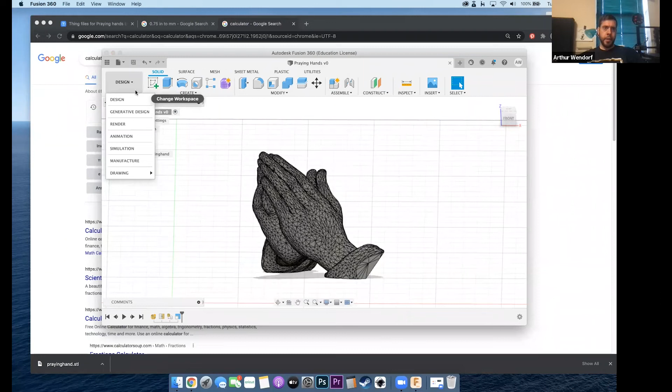So we're going to go to manufacture now. So we were in the design tab, now we're in the manufacture tab.

So now we're going to right click on setup, new setup. What we want to do is create the block of wood that we're going to be carving from. We're going to leave machine alone.

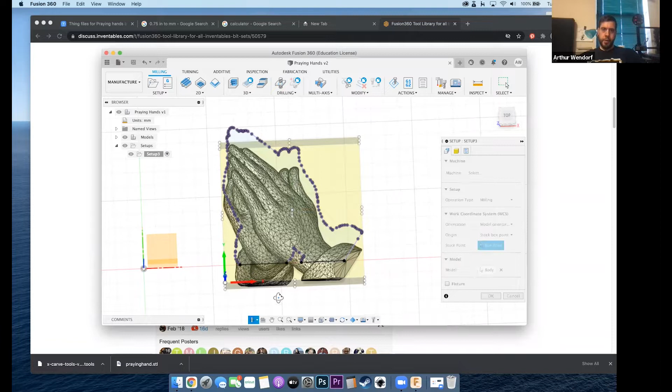We want to pick what point we want the machine to start at. We want it to start at the bottom left-hand corner here, but there are 3 dots there, one in the middle, one on the top, one on the bottom. We want it to be the top one of those. So if you look at it from this angle, it should be Z going up, Y going up that way, X going up that way.

All right, so we got the orientation. Now we're going to do the size of the box. We're going to do a fixed box size. We want the width, let's just click on top here so it makes it look right. So the width looks good.

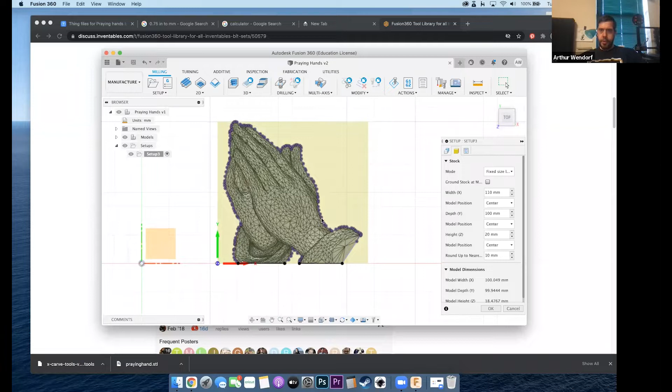We don't need to worry about that one too much. And just so it's not in my way, I'm going to click on the eyeball next to my sketch, so that's out of the way.

Now the depth, that's a little off, we're going to increase that. We'll make that 110, yeah that looks good. And those are centered, that's what we want.

The Z height, that's for the thickness of the wood. Remember, we said that 0.75 inches is about 19.05, and we're going to make it just a little bit more than that. So actually, what we'll do is we'll do 19.75. It's just one that I usually use.

Now these, the Y axis and the X axis are centered, that's fine. But for the Z one, we don't want it centered, we want it offset from the top, and we're going to offset it from the top by about 0.2 millimeters.

And then we're going to name this praying hands, that'll just be the name of the G code that it outputs. We'll say OK, now we have our box.

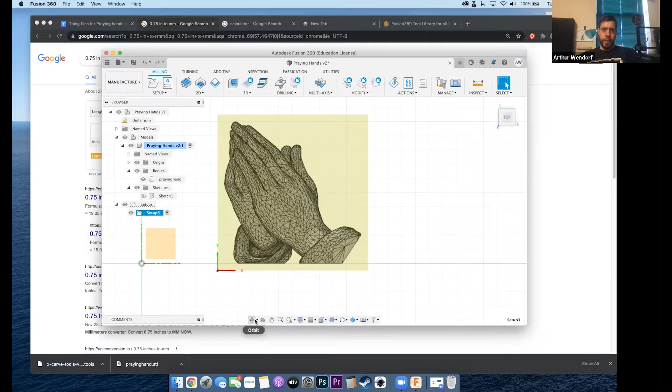Our box contains our model. Our model is a little offset from the top, and it has some room around the edges, so it looks pretty nice. Okay, so we're going to go ahead and save that again.

All right, so the next thing we're going to do is hog it out. We want to get rid of the bulk of the material that's in there. So we're going to do 3D adaptive clearing.

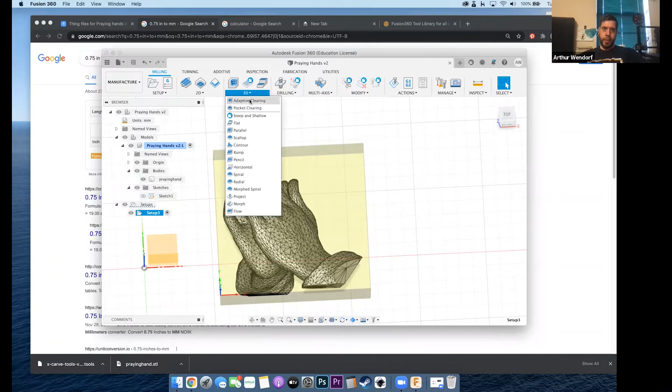So on this first one, we're going to select our tool. We're going to go to our X-Carve tools, and I usually use the straight end. It's also the black one, just so you know. So we'll select that, we're not going to worry about any of the settings on there.

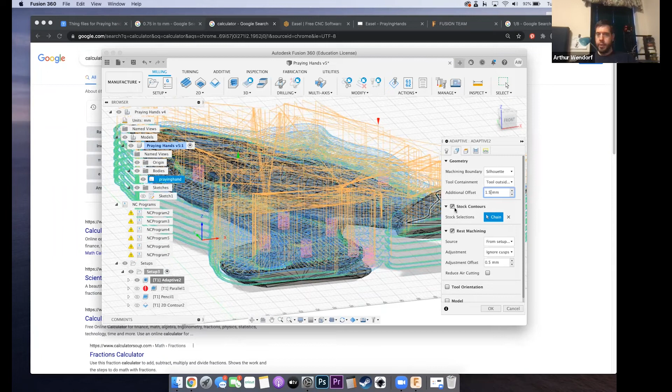On the geometry, for the machining boundary, we're going to use silhouette. We're going to have our tool outside of it. So because it has an offset here, we also want to have an offset up here. We're going to do 1.5, that'll give it enough room to go down all the way along the side, and that way the ball nose won't have to do that.

For our stock contour, we're going to turn back on our sketch here so we can see that. So we're going to select that. We want to make sure that when we have it, it is the nice blue line all the way around. Okay, so it's selected the boundary here.

We're going to leave from setup for the source, tool orientation, we're going to leave all that the same. For this, we don't want it to go all the way to the bottom, because what it would do is it would just break it loose. At this point, it doesn't have anything holding it there. So we're gonna leave it, we're gonna say about 3 millimeters on the bottom.

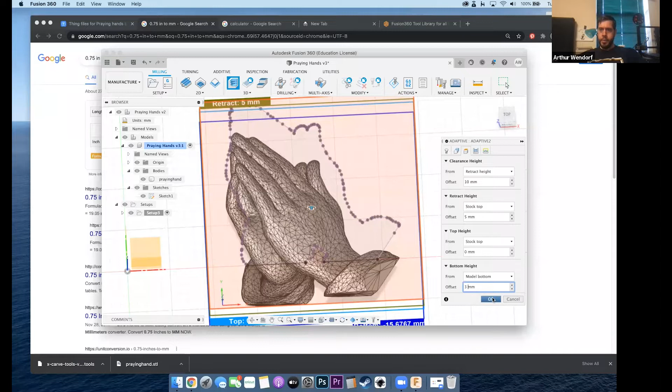On our passes, what we want to do here is we want to have our maximum roughing stepdown. We don't want it to go all the way down in one go, we only want it to do about 2 millimeters at a time. It'll automatically change the fine stepdown to 0.2, which is good.

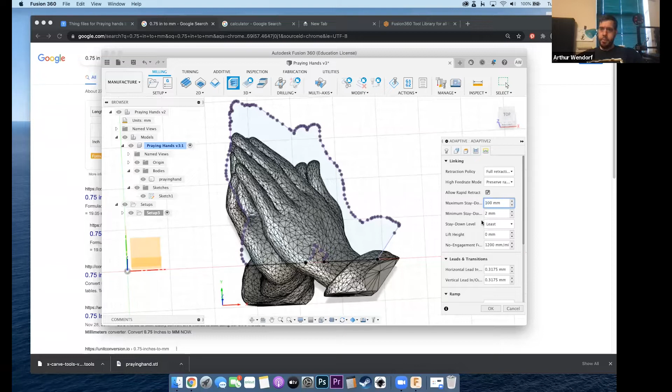That should be fine. The next thing we want to do is increase the maximum stay down distance so it doesn't keep popping up all the time. We're just going to make it 100 millimeters here, and then we'll say OK.

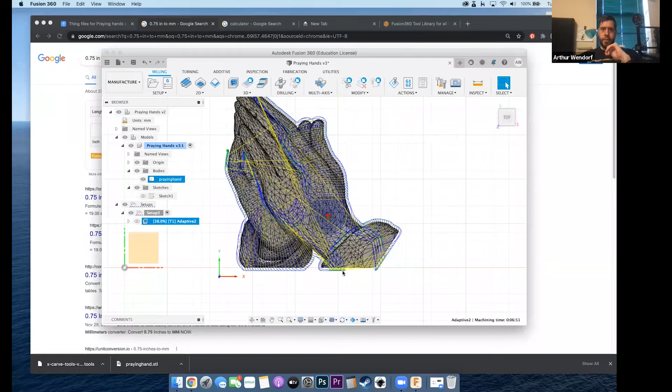Now it's generating the tool path, deciding where the bit is going to go. I'll turn off the sketch again. You can see it's going around the outside of the model like we told it to. The yellow lines show where it's going to pull up and travel without carving, and the blue lines are where it's actually carving.

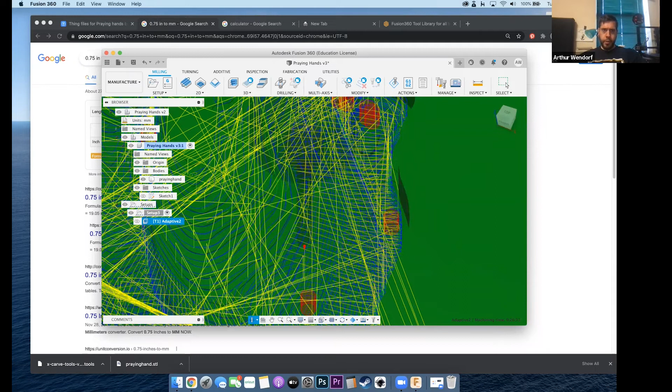So here we have the completed tool path for hogging out. If you rotate it and zoom in, you can see where it's been hogged out. This is just rough - it's not doing the fine detail yet.

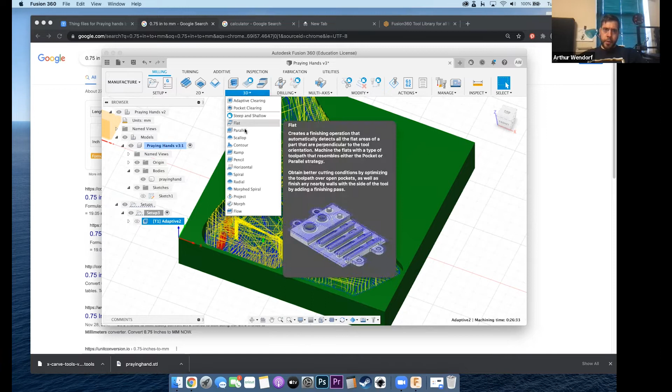So that's good, we got that 3D one done. Next we're going to do the more fine detail. We're going to go back to 3D and do parallel. Click on parallel. For the tool this time, we're going back to our X-Carve library, and we want to use the ball end - click on the ball end, it's the red one, that's what we want.

Leave all those settings. Again, we're going to leave it on silhouette, and do tool outside boundary. We are going to change something here - we're going to say rest machining, from previous, and ignore cusps, and change the adjustment offset to 0.

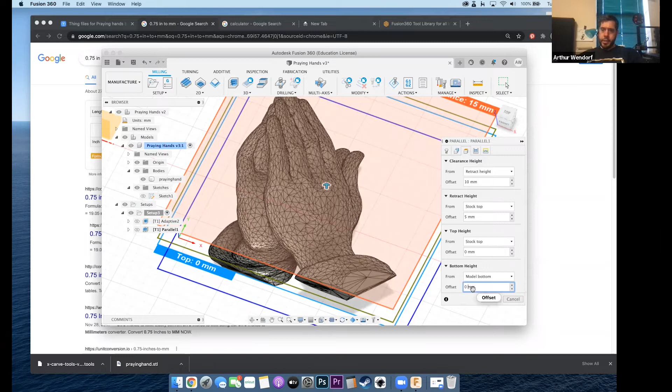That just gets rid of the extra layer since we're down to the details now. On this one, again we want to make sure we set this as 3 millimeters - we don't want it to go all the way to the bottom. For the step over on the passes, usually I do about 0.5 millimeter, and on the last one we'll leave that as 100 again. Then we'll say OK.

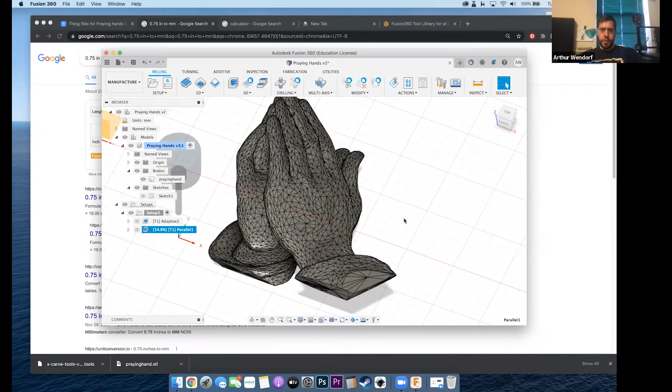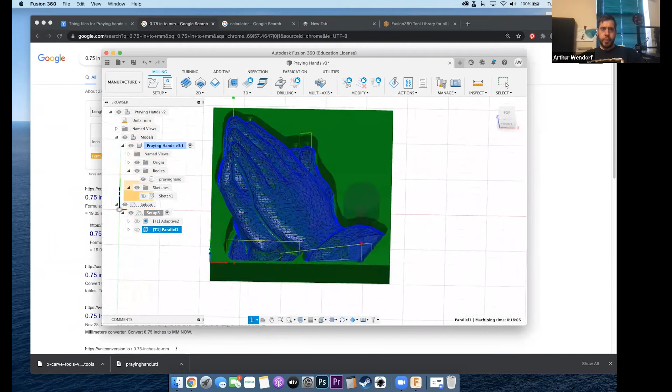So now it's going to compute this one - much quicker. You'll see it's going back and forth instead of just going in circles and drilling it all out. A couple things you want to look for here: make sure it hasn't tried to move through some stock left over. Sometimes it'll just go right through a big piece of stock we hadn't hogged out, though it doesn't look like it did here.

Okay, so you can see that's looking pretty nice right there. It's already got a lot of good detail and it's looking a lot smoother.

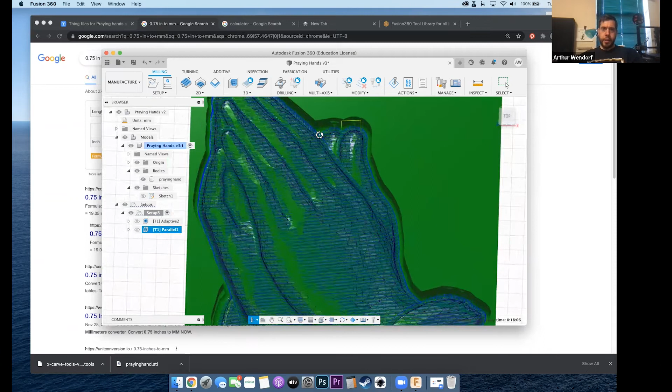We are going to do one more 3D here - we're going to do a pencil pass. We're going to select a tool, using the same tool, the ball we did before, the red one. So select.

Here again, silhouette, we're going to do tool - this time we're going to leave it on center on boundary. Again, we don't want it to go all the way down, just leave it off by 3 millimeters. All this should be fine, we're just going to say OK.

So the pencil pass adds in the fine details - see, it's doing the sharp edges and stuff, like the creases between the fingers and around the sleeve.

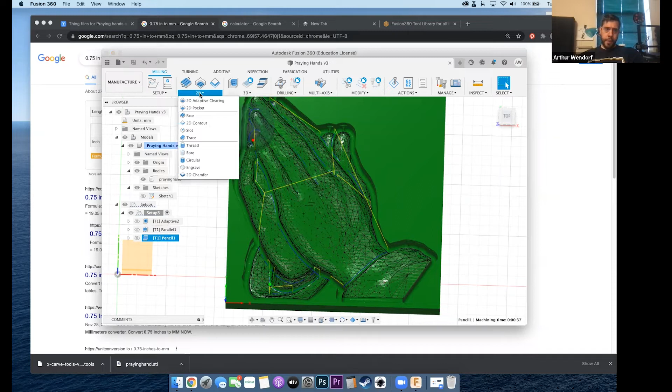And then the last one we're going to do is a 2D, and we're going to do a 2D contour. For our tool, we're going to go back to the good old black one, right?

The flat end mill, select that. And we're going to say okay. I'm going to select my contour selection.

So we need to see our sketch again, so we're going to select that. Now you'll notice it has this red arrow right here. You want to make sure the red arrow is on the outside, otherwise it's going to do it on the inside and that'll eat up your stuff there.

We do want tabs. We want our tab width at 3 millimeters, 3.1, something like that is fine. We're also going to make the tab height at 3 millimeters.

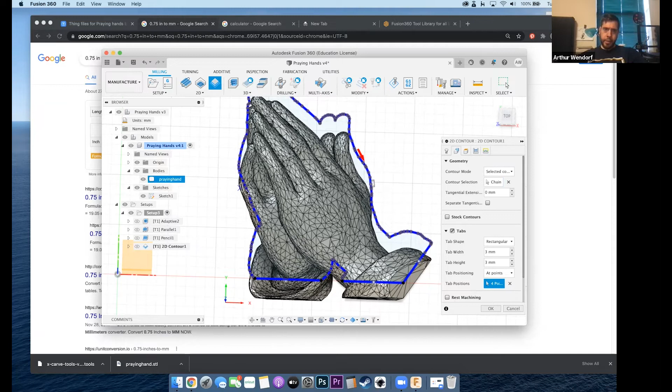I'm not going to do it by distance, I'm going to do it at points. So I'm going to click on several different points here. I want a tab there, I want a tab there, I want a tab there. That looks like a good place for a tab. Oh, that looks like a good place for a tab. Right there. We'll do one more right there. You don't want to do too many, but you don't want to do too few.

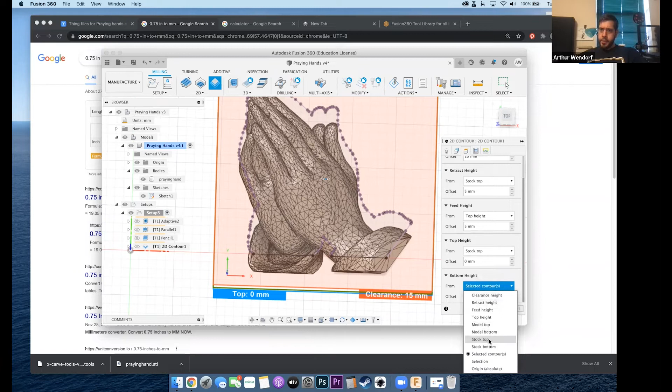Okay, so bottom height - this time we do want it to go all the way to the bottom. So we're going to say not selected contours, we're going to say stock bottom, offset by 0. Remember that we told everything to drill down to 3 millimeters from the bottom.

So now what we're going to do is say, well, we want to start at 3 millimeters from the bottom. So at stock bottom, we're going to change that to 3 millimeters. So the height is stock bottom 3 millimeters, and the bottom is stock bottom 0 millimeters. So it's going to start at 3 millimeters from the bottom and go to 0 millimeters from the bottom.

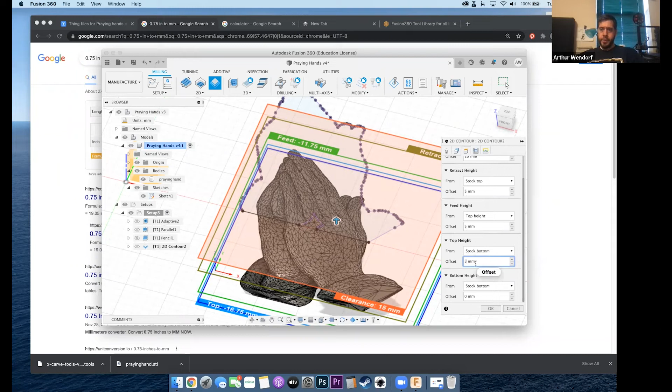All of these settings on this one should be fine. We are going to say multiple depths, maximum roughing step down, we'll put that at 2 millimeters, and then we'll say okay. So now it's going to generate this.

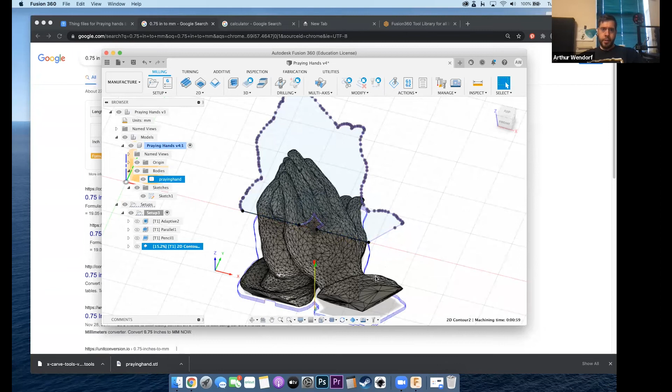Okay, so now it's generated that toolpath, and you'll notice that it left the tabs there. So there's still some green showing where it's connected to the rest of the stock, but it's eaten through the rest of the way. So there's holes all the way around so that it'll break out nice and easy.

All right, so we have that. We have all of our paths ready to go. So we're going to save again. So the next thing we need to do is post-process, which is where we actually create the G code for this.

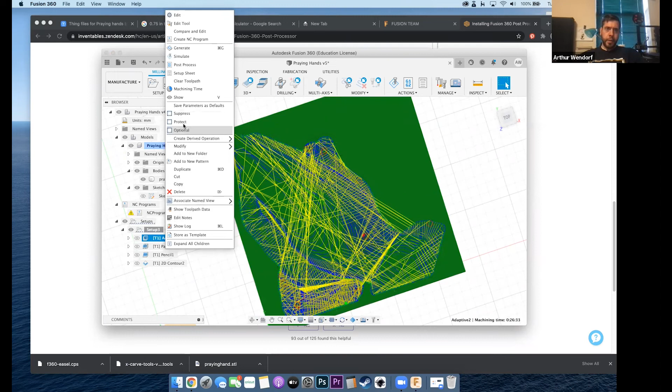So we're going to right click on this, we're going to say post-process. In here, we're going to click on this folder, go to cloud, easel, select. Okay, we want to change it to a different folder here. We're going to select our output folder, and select the desktop just to keep it simple.

So open - this is easel, this is our name here, we're sending it to the desktop. We'll say post, and it says it was posted successfully. So let's just double check by minimizing all of our junk here. So we do indeed see praying hands, which was successfully posted.

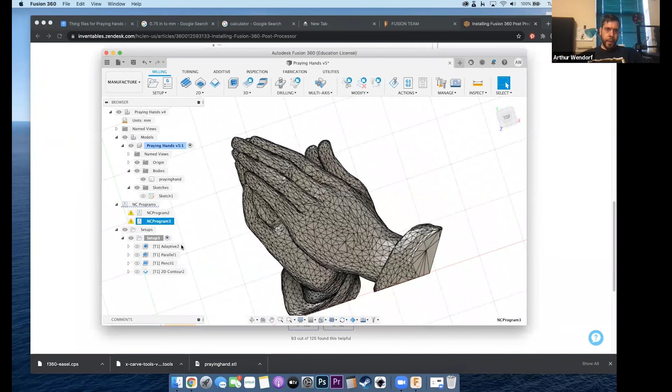So we'll go back to Fusion. So we did this one - this was with the black one. These two are with the red, and this one's with the black. Since these two are with the red, we can do both of them at the same time, so we'll select them both.

Right click, post process - so again it's easel. Let's go into the desktop. We're going to add a number here, so this is praying hands 2. And then we'll say post. So we can see it created praying hands 2.

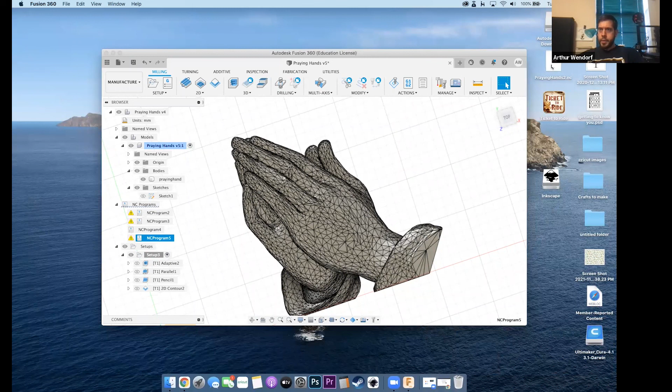And then our last one here, we're going to post process this one. This will be praying hands 3. This one's getting back to the black one, and then we'll post. Okay, so now we have the code - this is praying hands 1, praying hands 2, praying hands 3. So we have our 3 files: our first file, our second file, and our third file.